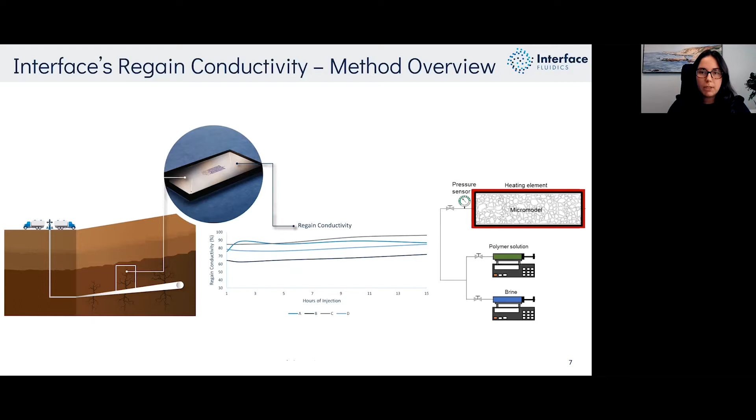This is just an overview of our regain conductivity methodology. You can see that what we are doing is we're actually replicating the frac zone on our reservoir analogs, and we're able to screen friction reducers and get a regain conductivity value using our technology. On the right-hand side, you can see a schematic of our laboratory setup. And so what we have is our microfluidic device is connected to a heating element. We're able to go up to 200 degrees Fahrenheit on this particular setup. That's connected to high accuracy flow through sensors, as well as microfluidic pumps. I'll go into more detail on that as we go through the slides.

But first, I think we should take a step back and talk a little bit about the conventional proppant pack testing. So conventional proppant pack testing utilizes typically 40 to 70 mesh sand, and it's sandwiched between two core platings. Typically, those cores are a standard laboratory core like Ohio sandstone, or they're a customer submitted core. Of course, with this technology, there's a lot of advantages. It's an industry accepted method, and there's a lot of historical data used for comparisons.

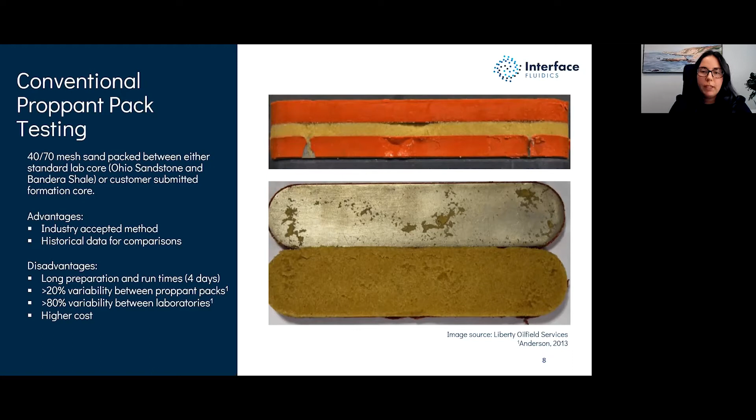But what we've also identified through talking to our clients and through this development work is that there is a long preparation and runtime associated with this style of testing, on average of 4 days, but it can be longer depending on certain parameters. According to literature, there's also a high variability between proppant packs themselves. And if the operator is changing, there's a high variability between laboratories as well, up to over 80% variability. So of course, with all of that, the longer times and using lab core, there's also a higher cost associated with this style of testing.

Also, due to the nature of microfluidics, we're able to really reduce the sample size that's required to under 250 milliliters of fluid. Just a single test takes under one milliliter of fluid. So because we've been able to really standardize our testing platform, there's a potential for aggregated statistics. And the results that you obtain today, they'll be comparable again in the future. So we've really taken out the variability of the proppant pack itself and replaced it with something that's highly controlled.

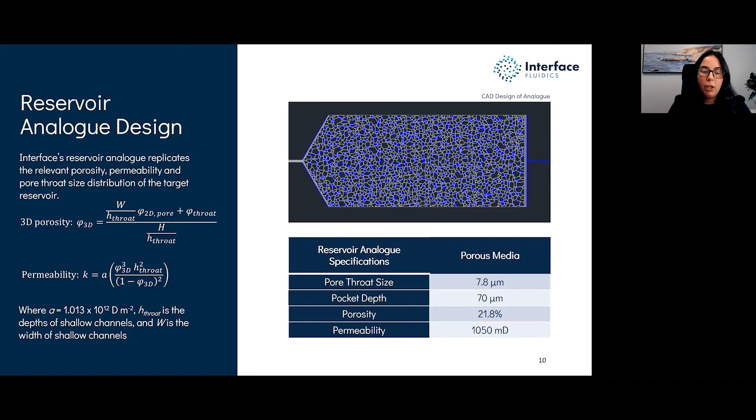When we're talking about the performance indicators, what we're looking at is measuring the pressure differential across the system. So initially, we measure the pressure drop of brine through the system to obtain our baseline. We then inject the polymer or the friction reducer through the system until we obtain a stable pressure drop. This is typically done for about 5 to 6 hours. And then we again flow brine through the system.

So what we're looking at is comparing the final pressure differential of the system to the initial pressure differential. So that gives us a damage factor, or essentially a ratio of regain conductivity in the system. And from that, what we've done is we've created a relative regain conductivity value. So the values that we'll be reporting on today are a regain conductivity percentage.

And just to quickly give an overview of key performance metrics. So of course, the main thing that we're looking at is the regain conductivity in the system, but there's also other insights that we're able to obtain throughout the testing. So we're looking at different things like time to stabilize, how long does it take for a friction reducer to clean up in our system, and then the change over time. So some friction reducers may start out highly damaging, maybe indicating certain solubility problems or injectivity problems. But as they go through the test, they clean up very well. So that's another thing that we look out for.

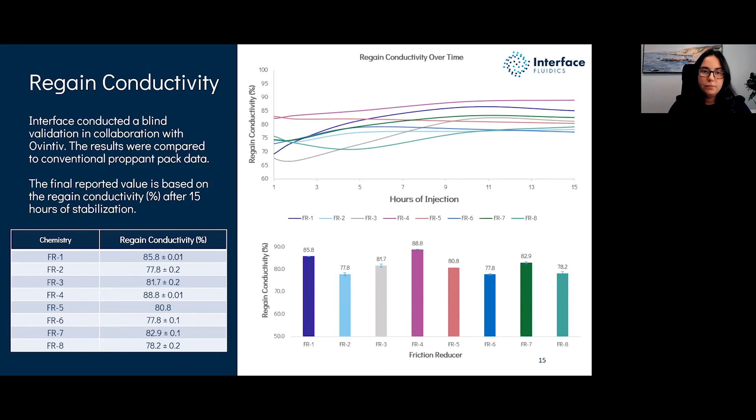When we further looked into the regain conductivity, we separated it into freshwater friction reducers and brine friction reducers. Looking at the freshwater friction reducers, you can see that all of the friction reducers that we used followed a similar trend, with FR1 outperforming FR6 and FR7. We also noticed that FR1 and FR7 took the longest amount of time to stabilize, about 10 hours, whereas FR6 only took 5 hours. However, even though it stabilized the fastest, it was the most damaging overall.

Looking at the brine friction reducers, looking at high salinity FRs such as FR3 and FR5, you can see that they resulted in a comparable final regain conductivity value. However, FR3 took 10 hours longer to stabilize and was more damaging in the first half of injection compared to FR5.

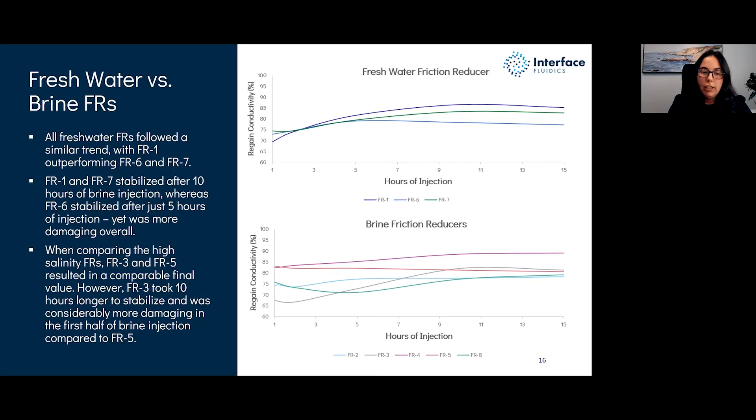Now moving on to Rockwater. So what we did with Rockwater is we really took this concept of using our technology for regain conductivity, and we wanted to see how we could use that for further optimization of the FR package. So I'll walk through different parameters such as breaker concentration, powdered versus liquid FRs, and so on.

So the first thing to note here is just the final regain conductivity values across the 6 FRs that we tested in this case. So we tested 6 different FRs with and without breaker. Looking at the final regain conductivity values, you can see that in the cases of 4, 5, 6, and 8, there was considerably higher damage without breaker. In the cases of 7 and 9, although the values are comparable, using breaker actually increased the amount of damage, at least looking at the final regain conductivity value.

When we look at the trends over time, which I'll show you in the next few slides, you can see that although the final regain conductivity value may differ slightly, it may still be better to use breaker in this case. And I just want to point out as well that the breaker in this project is notated as E.

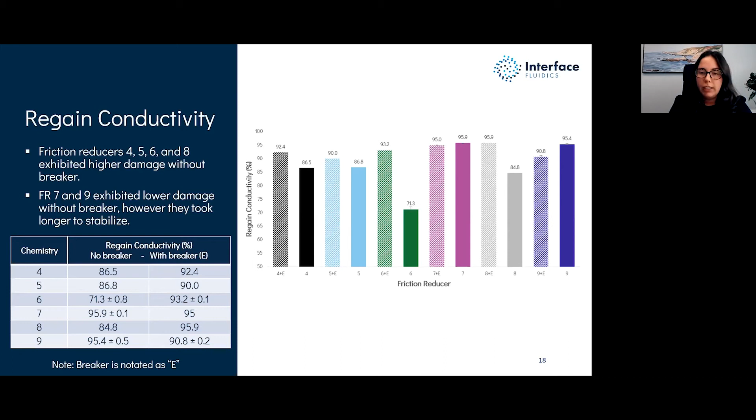All right, so looking at broken versus unbroken FR, you can clearly see that there's considerably more variation from the unbroken friction reducers compared to the broken friction reducers. And in all cases, broken friction reducer produced less damage when considering the entirety of the run than unbroken friction reducer. So we're also able to use this style of plot to evaluate key insights such as solubility of the FRs, injectivity problems, and long-term performance.

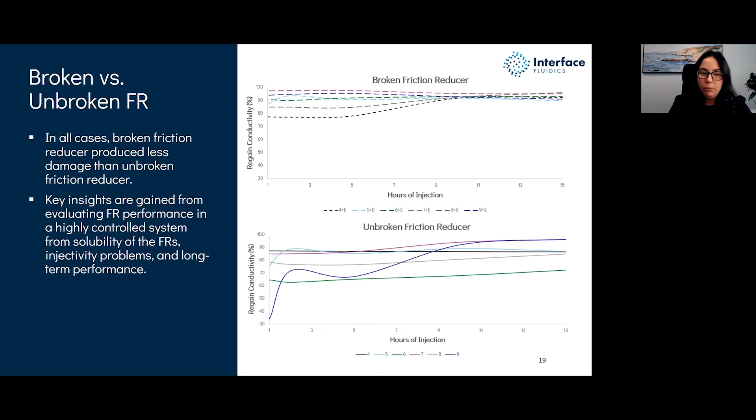Now, if we separate those same 6 friction reducers and we break it down into liquid versus powder friction reducer, we can also gain some insight into the different preparation methods and their impact on performance. So if we look at the liquid friction reducer in this case, FRs 5 and 6, they required less breaker to achieve the same level of performance as the powdered friction reducer.

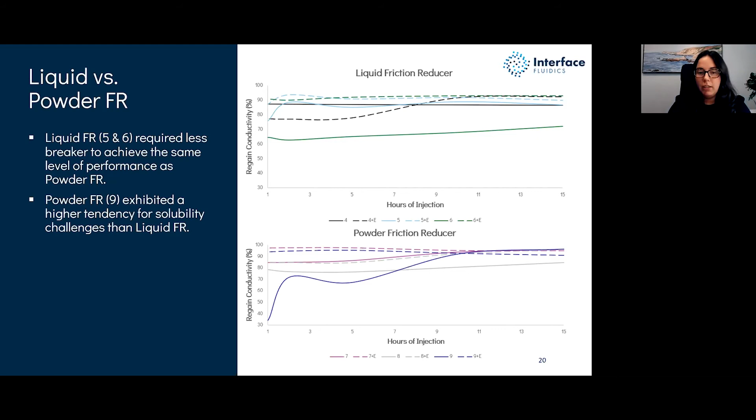In the case of the powdered friction reducer, you can see that purple line that starts way down in the 30s, it exhibited a higher tendency for solubility challenges than any of the liquid friction reducers. So being able to gain insights like this may help you in your field decisions.

So we also did an analysis on low versus high salinity. So in this case, we had 2 friction reducers, and we initially ran them in low salinity with and without breaker. So you can clearly see in both cases that the unbroken friction reducer, which is the solid line, resulted in the most damage. So we then took the broken friction reducer, which performed very well, and we put that into a high salinity API brine.

So that API brine was 8.5% sodium chloride and 2.5% calcium chloride. We did see a minimal difference between the low and high salinity case, indicating that these 2 FRs had a pretty good salt tolerance. We did see a minimal change in FRB, a slight reduction in performance in the high salinity case.

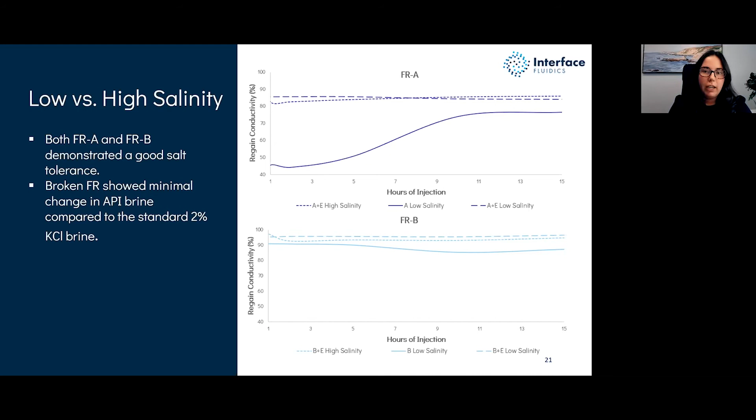So just to summarize some of the outcomes that came out of these 2 case studies, we were able to isolate and quantify the variables affecting friction reducer performance, such as FR concentration, temperature, brine salinity, and breaker. We were able to do this in a very short amount of time. So we actually ran 20 regain conductivity tests in just 12 days.

So compared to conventional proppant pack methods, this saved 2 months of laboratory time and more than 50% in cost. We were also able to demonstrate a method with less than 5% variability, providing more reliability and differentiation between the products compared to traditional methods of up to 80% variability.

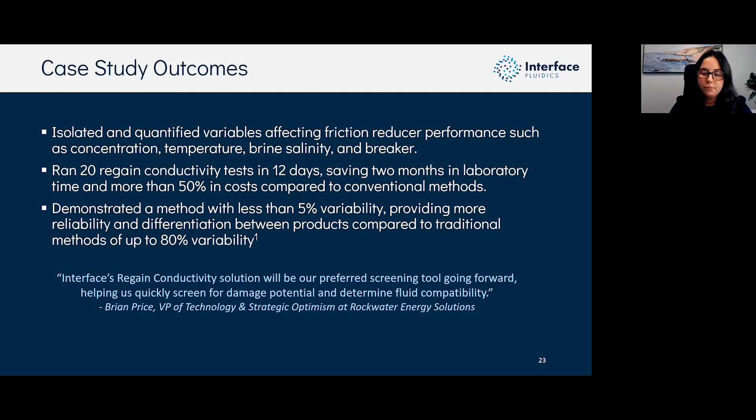With that, I'd like to open it up to questions. There we go. I'm back. Thanks for that, Jillian. That's very interesting results.

Can you talk to me a bit about, you said we have a standardized porous media that we use today. How did we come up with that design, and why did we select that one? Yeah, that's a great question. So typically at Interface, we work with highly customized analogs, depending on the application, the specific reservoir, or the well that we're working with. In this case, we wanted to create a standardized reservoir analog to really represent the proppant pack, to enable faster, repeatable screening.

So what we did is we went through a series of different iterations of the reservoir analog design, all the way from including nanoscale features to the design we've now settled on, which is representative of that 40 to 70 mesh proppant pack.

Great, thanks. And I got a question here from the audience about temperature and pressure limitations. Can you just reiterate what those are? For sure. So in this case, for regain conductivity specifically, we have been running these at atmospheric pressure; taking that up to 3,500 PSI, like our other testing, is in the works. So we're currently running at 200 degrees Fahrenheit. But once again, we're working to bring that all up to the same level as our flowback and EOR offerings, which is in the 300 Fahrenheit range.